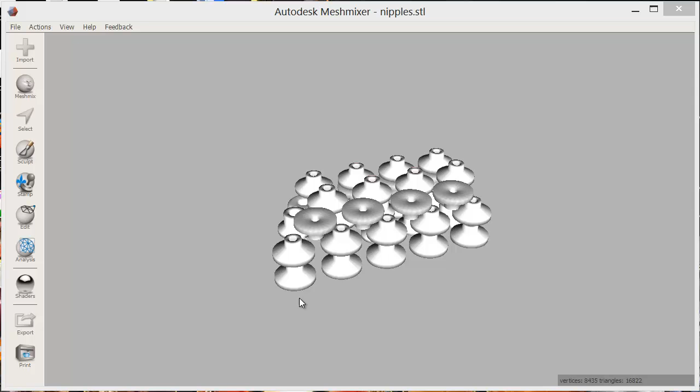So I made this model. These things are really small, about 28 millimeters by 16 millimeters by 48 millimeters. So this whole set, all these little parts, they're probably about that big, life size.

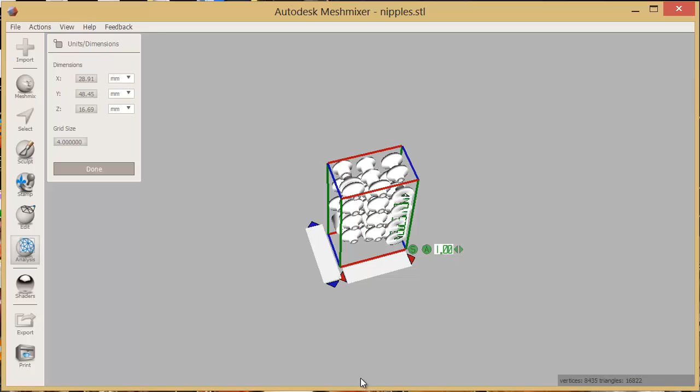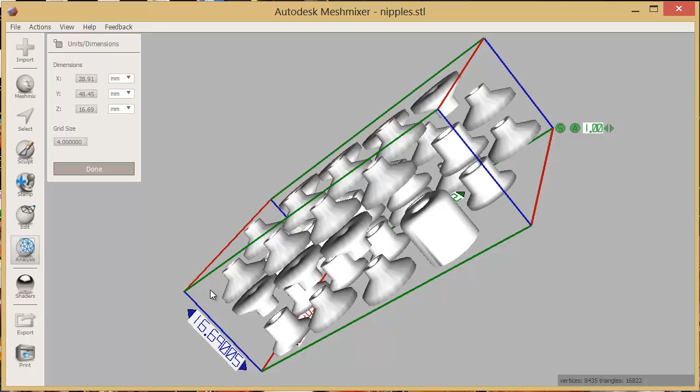It used to only cost a few dollars to make under the previous Shapeways pricing structure, but Shapeways is changing it to now charge $1.50 minimum per part. This is, I think, 30 different pieces, so that'd be a minimum of $45, plus all the material printing costs, and the amount of space it takes up in the machine is a factor too. In the past, it was kind of just the material you were using plus $1.50 startup cost for the whole model.

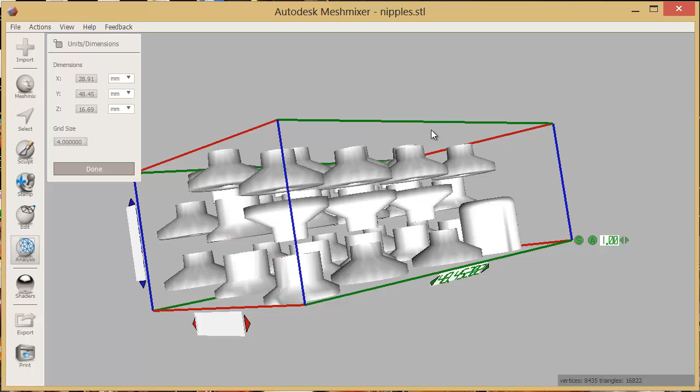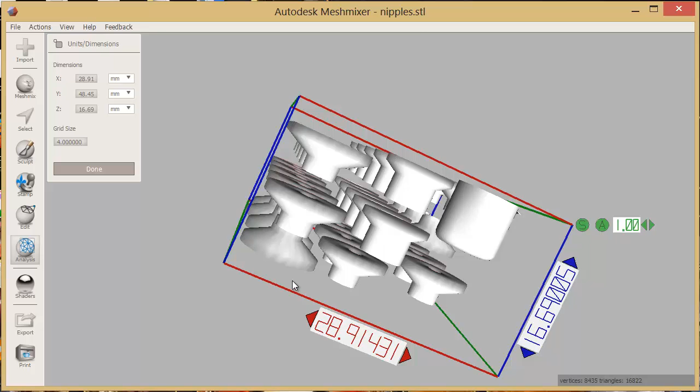One reason they're doing this is because it takes a lot of time for them to sort out and count all the pieces, make sure they have each one, and clean each one off individually. So if you do them a favor, they'll do you a favor. Granted, they did increase the prices, and then they're going to give you a discount off those increased prices.

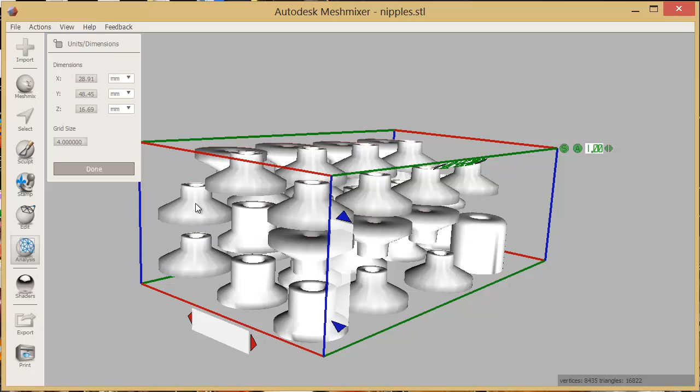But if you want to save a whole lot of money, you can incorporate all of these as one part, connected inside a cage - not connected, just trapped inside a cage. Then Shapeways will print the whole thing at once and grab it from the box as one piece, so it's a lot easier for them because they know all your parts are in there. As long as you make the holes in the cage smaller than the parts you have, nothing will fall out and you're good to go.

I've already arranged these so they're pretty close and nicely packed, because you don't want to take up too much space - they charge 21 cents per cubic centimeter of space you use now, in addition to the 28 cents of material, plus $1.50 per part.

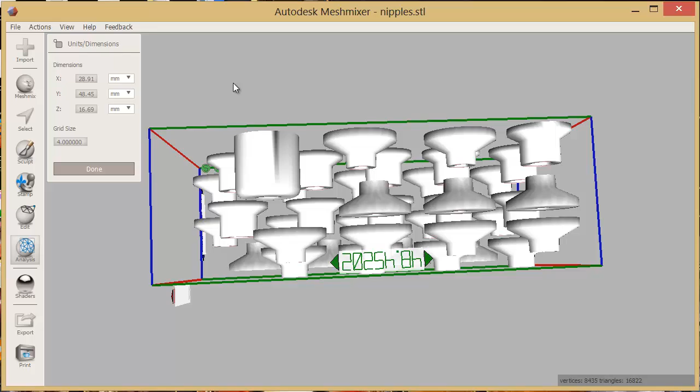So, first step is to go to File, Import Plane, and hit Replace - actually, don't hit Replace, my bad. You hit Append. If you hit Replace, you lose everything you had. So I'm going to go Import, replace this with what I had before - I had this file saved, luckily.

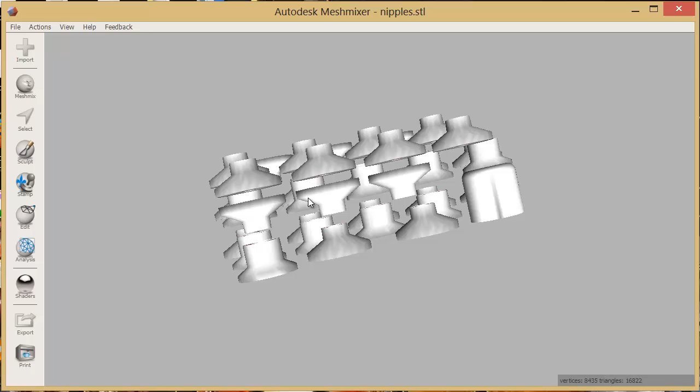So it's a mistake that I make sometimes - make sure you don't make it. You go to File, Import Plane, Append. Yeah, so we've got it there.

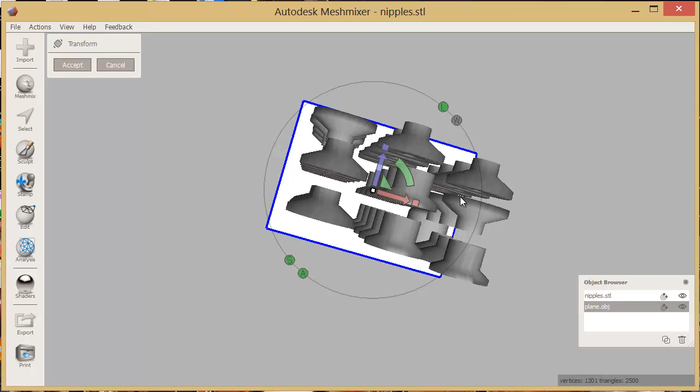I'm going to resize this plane so that it's slightly larger than my shape, and we're going to define the final cage - the dimensions of the cage we're putting in. You don't have to be super exact, but make it a little bit larger.

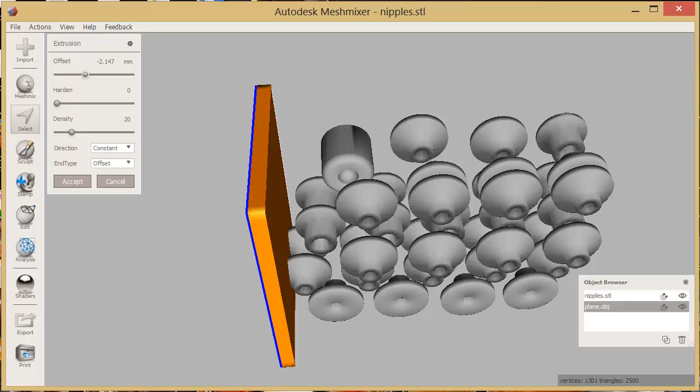Then I'm extruding this plane so it's slightly larger than the whole set. If you hit the button where the tilde is, but without hitting shift - it's to the left of the one key - it'll make the box invisible so you can see inside.

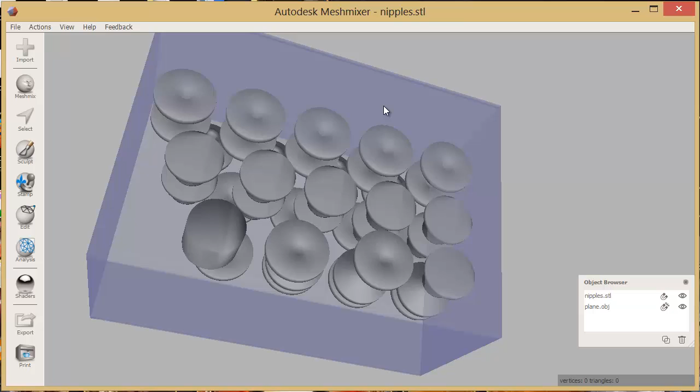So that's pretty good. I'm going to scale it up slightly so it's a little bit larger. Yeah, that looks good. I'm a little bit bigger - I'm definitely way bigger this way, so I'm going to shrink it in just this direction, a little bit more.

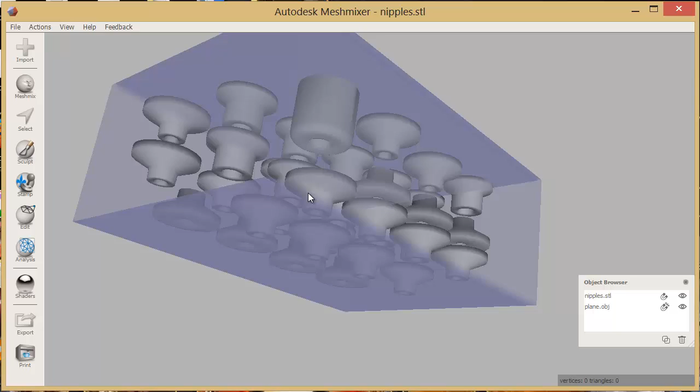Alright, so you can't put these parts too close together. You need about a millimeter of clearance, or else they'll reject it, or the parts might fuse together. So that's about as much as I have there. You can go and measure it.

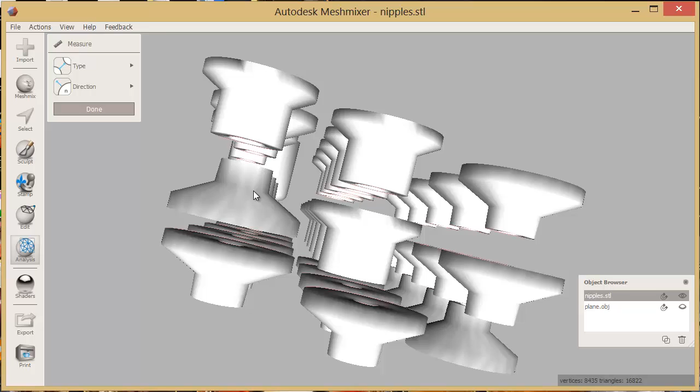It's this tool and then this tool. So I have 1.47 there, 1.3 there - it just shows you the gap. So that should be good.

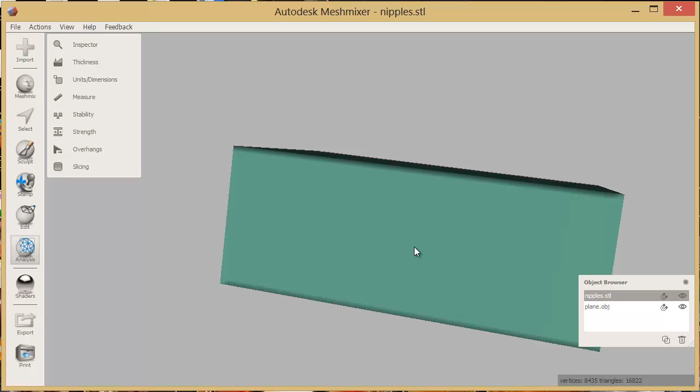Turn my box back on there. W lets you see the wireframe. These triangles are too organized, so I want to disorganize them: S, click, E to expand, R to do a remesh.

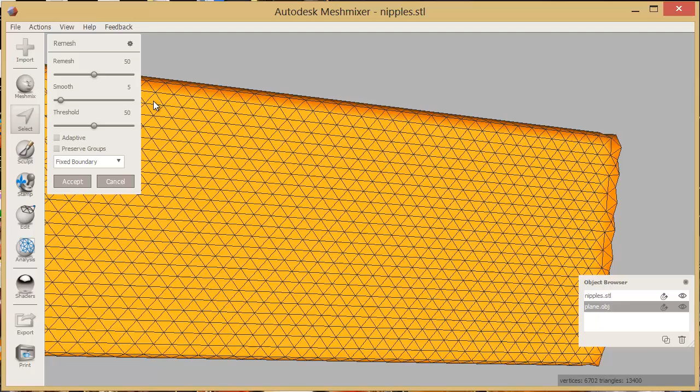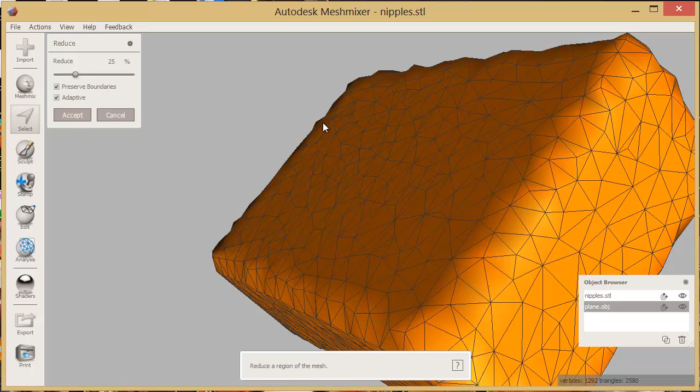I'm putting smooth all the way up, and put the remesh about there. The triangles are now all disorganized. Then Shift R lets you reduce the amount of triangles - you don't want to get too low, or you get these crazy points.

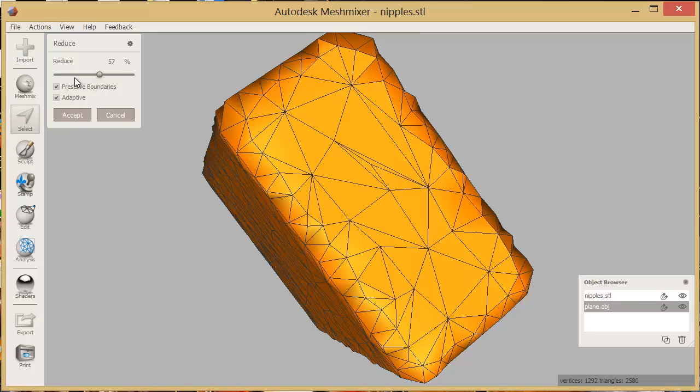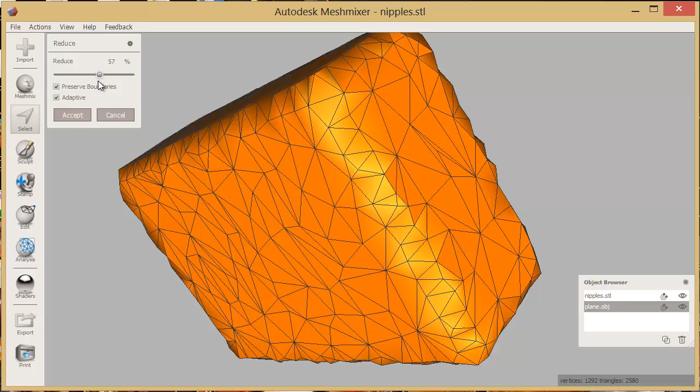Because then the final cage will have a big giant hole here and a big giant hole here, so it depends how small your parts are. If you make it all the way like this, your cage will be very solid, and your holes will be very small, which means your parts definitely won't fall out, but you'll be using up too much material, and you have to pay for the material for this cage. So I'm going to estimate that this is probably good - that level of density.

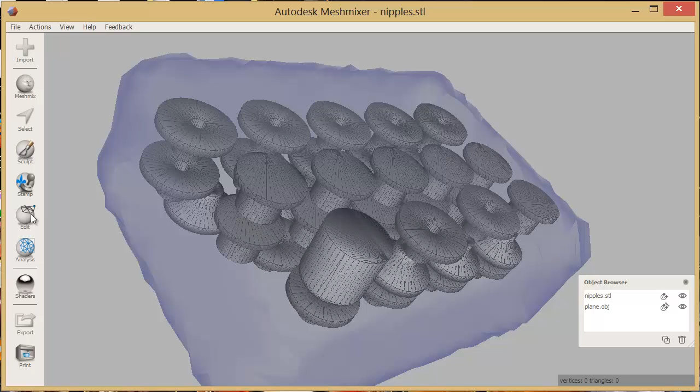So I have it at about 57% here. I'm going to hit accept, and then you go to edit, make pattern, and change this first one to dual edges. That looks plenty good.

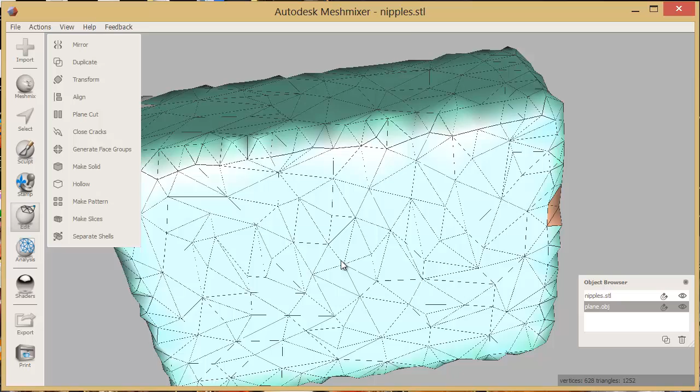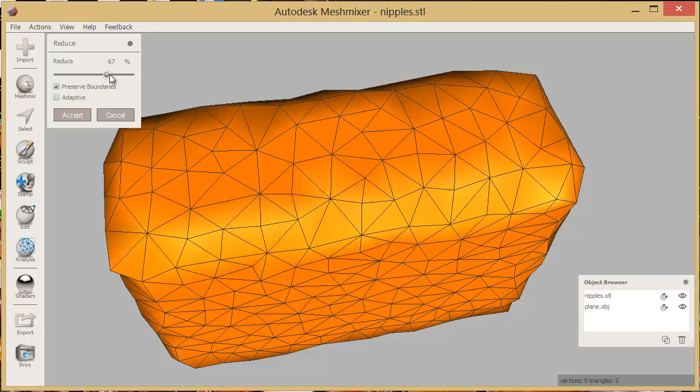I don't like how it's too bunched up at the sides and very loose in the center. So I'm gonna go back. I'm gonna undo to when I was reducing and turn off adaptive. That's what you do to fix it. Turn off adaptive. And I think it was tighter than I needed, so I'm gonna loosen the mesh a little bit. So I have it at 70% here, and it's like that.

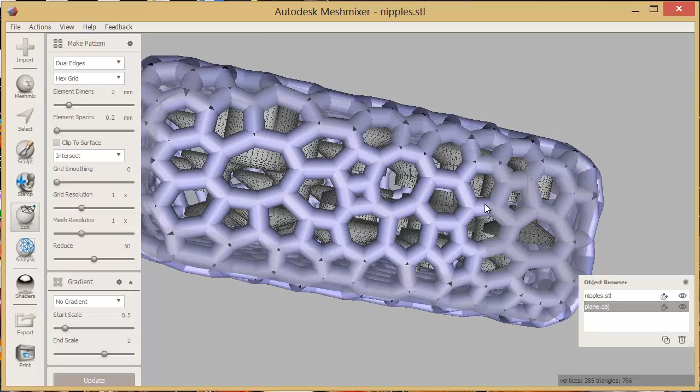Accept, and then go pick my mesh, edit, make pattern, change to the second one. That's pretty good. I could probably get looser, so I could have made the mesh a little bit bigger, but it's fine. I'm going to change this element dimension from 2 down to like 1.3 or so, 1.2. So that's the diameter of these little tubes. I'm going to put it at 1.2.

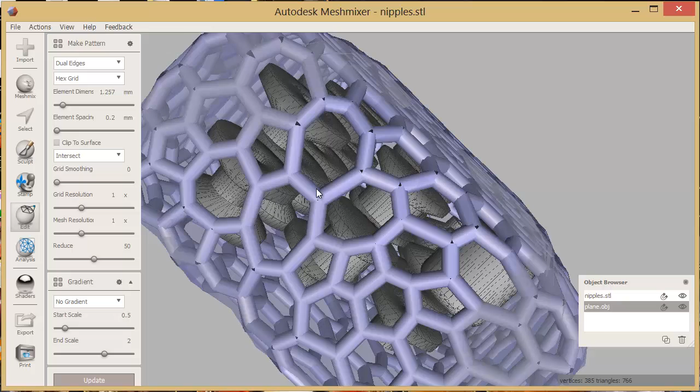If you make them too thin, then they'll break apart, and you won't get your parts because the cage will be broken, and they won't ship you anything, or they'll reject the part for being too thin. Technically, you can go as thin as 0.7. That's the thinnest that Shapeways will allow you to go. I wouldn't recommend going that thin.

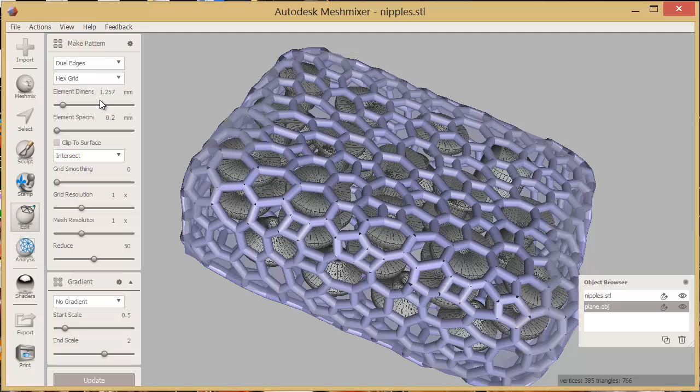It depends. If you're going to put this in the tumbler, then you need it a little bit thicker. Your parts won't get as polished because they have a cage around it, but depending on the size of your parts and the size of the holes, the ceramic media can fit inside there and polish it and then fall back out when it's done in the polisher. So it just depends on your settings, but if you make it too thin, they'll break.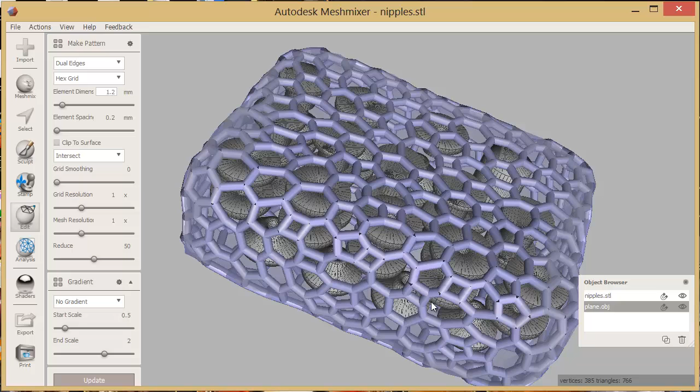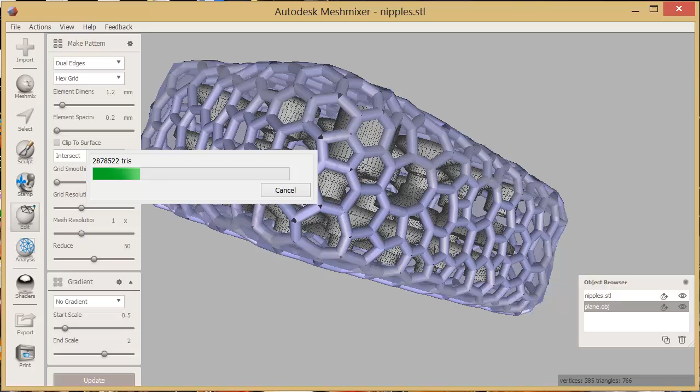So I'm going to put it at 1.188. I'll put it at 1.2. There you go. So it'll look like that. This is the preview that we're in. When you hit accept, it'll bake this so it's all together. Oh, there we go. So it's all joined together now.

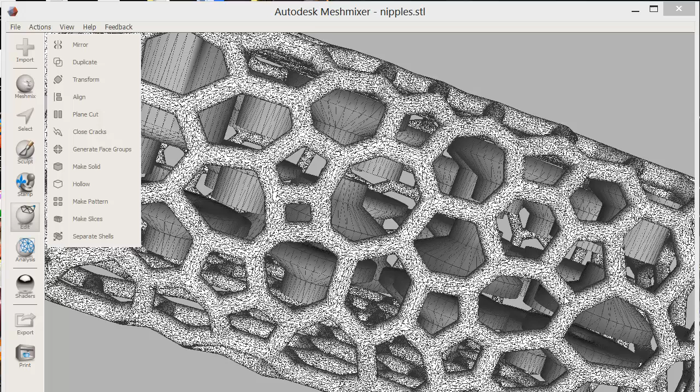But they're separate sections. I have a really high poly count here. I could have reduced it more. We're still under the 1 million polygon limit, so it's not a problem. But your mesh doesn't need to be this dense. See how I have tons of triangles here. There was a setting in the pattern dialog that let you set the reduce. So if you turn that number up, then you'll have less triangles.

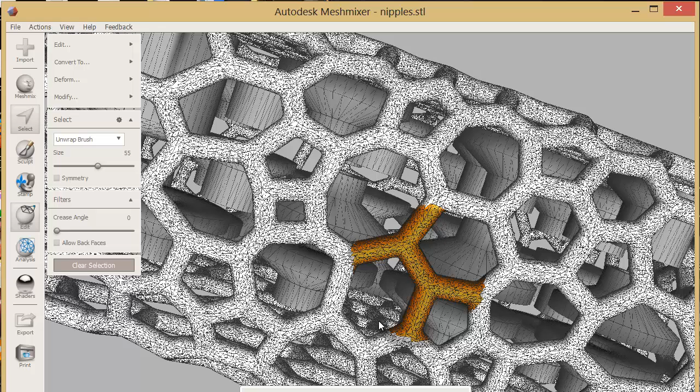You can also do it after the fact by just clicking S, clicking your thing, expanding the selection, and then hitting Shift R. That'll bring up the reduce dialog. But since it's so many triangles, it takes a little bit. So there you go. I'm gonna put it up to 50 or so, halfway, and it'll make a whole lot less triangles since we don't really care about this mesh at all.

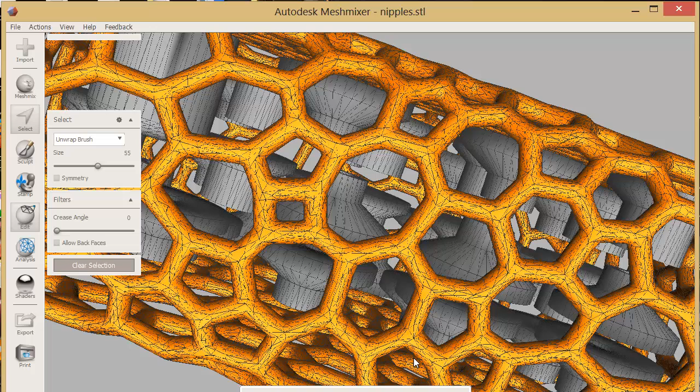More triangles just means a bigger file size, so it'll take more time to upload and more time for Shapeways to render it in the browser, and also more time for them to process it when they print it. Just like if you're slicing G-code, a really high-res mesh will take longer to slice. Alright, so I reduced it a bunch. We were at 881,000 polygons, and now we are at 153,000.

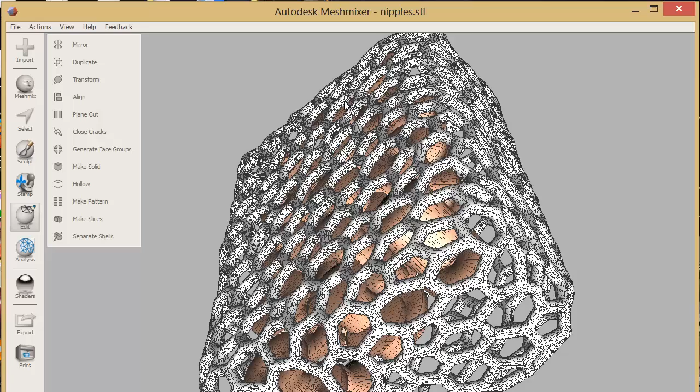The last step is just to join these two together. So I'm holding shift, I'll click both and then hit combine. So now they're all one mesh, and they're trapped and ready to go. So I'm going to go ahead and file export and then upload this to Shapeways.